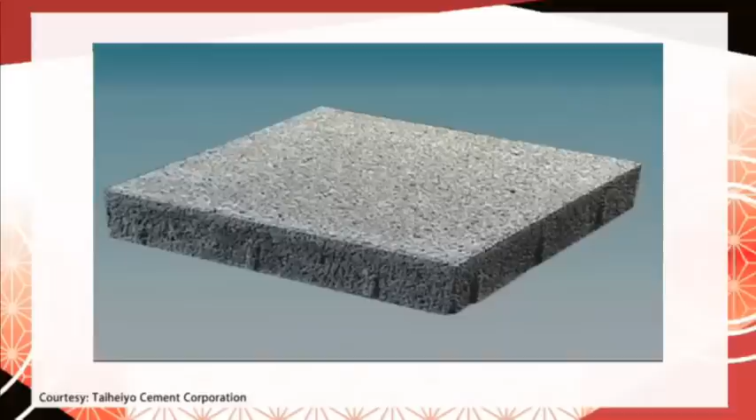One example is so-called porous concrete. It's gaining attention internationally because it allows water to pass through, as you can see over here. It's very interesting. You think that concrete is something that blocks out water and is very solid. I can't agree more, but this porous concrete has numerous consecutive spaces inside to let out water, and is also referred to as permeable concrete.

This material is often used for roads and allows rainwater to seep underground, so it prevents such problems as water spatter, reflecting flare from car headlights, slipping tires, and also hydroplaning. Wow. It's hard to imagine that something as common as concrete could incorporate such complex technology. Now, the biggest cement producer in Japan is called Taiheiyo Cement, and we had an interview with the president, Shuji Fukuda, so take a look.

Executive Insight. Concrete and concrete products are used all around us. Examples include structures such as buildings, bridges, roads, tunnels, and massive dams. Essential for making such concrete products is cement.

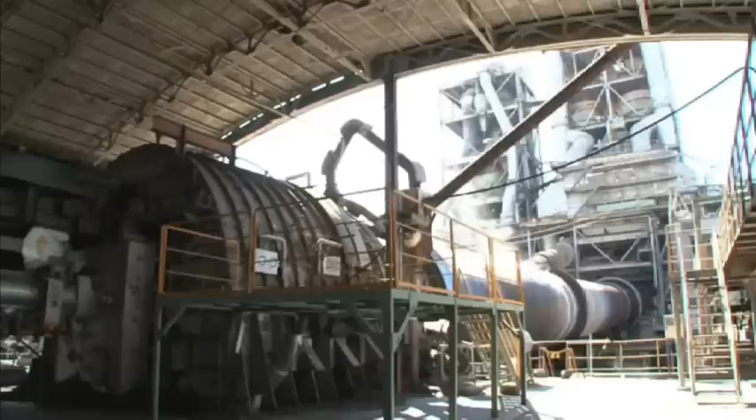Japan's biggest cement producer, Taiheiyo Cement, has a 130-year history and is said to have been one of the companies that literally paved the ground on which the Japanese economy was built. Overseeing the vast business is the president, Shuji Fukuda. You were founded 130 years ago and have grown from a locally based business into a company with the top market share and nearly $7.5 billion in revenue. What has been behind this growth?

In the beginning, the business of cement was locally based. Then capital from Tokyo started flowing into the industry, spurring mergers between companies. There were quite a lot of independent firms back then. The history of cement has been walking lockstep with the development of Japan.

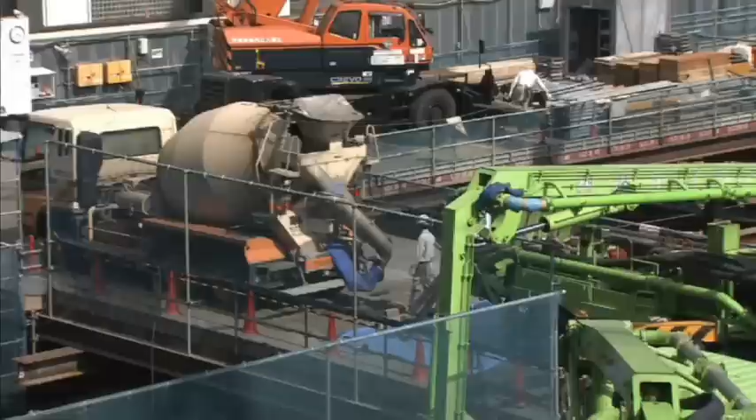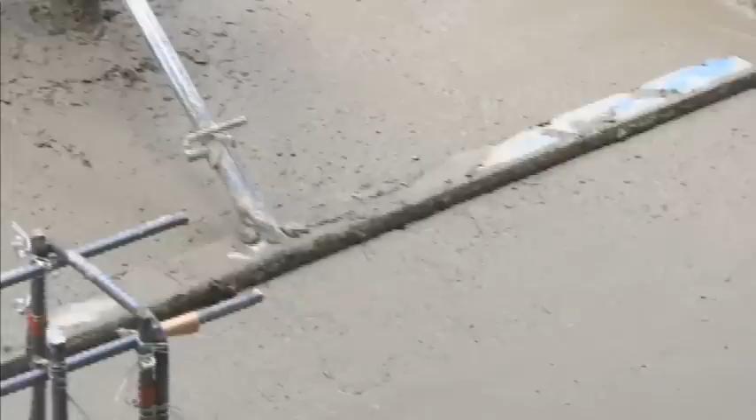The most commonly used cement is called ordinary Portland cement. Accounting for 60% of the cement produced in Japan, it is regarded as being safe, strong, durable, and easy to work with. Due to the high versatility of the material, it has been used in concrete for a wide range of fields, including general civil engineering and construction.

Concrete is, of course, something you use for 50 or 60 years. In terms of cement, quality is the most important factor. A big reason we're trusted is because customers believe that our products won't fail no matter what happens. We've had long relationships with our customers, some for up to 130 years. We have to make sure never to betray their trust. That's why I'm very demanding about quality.

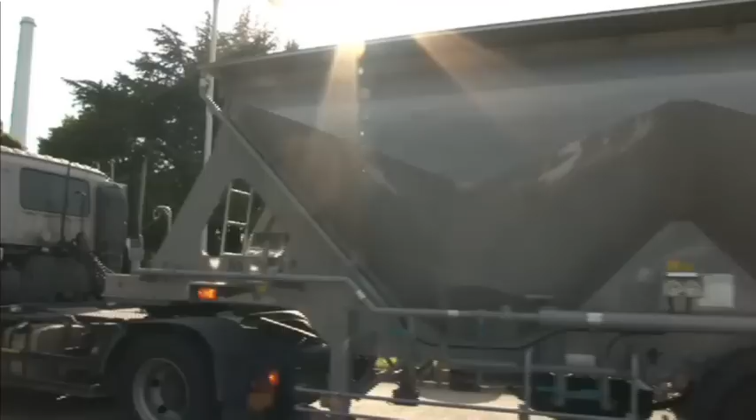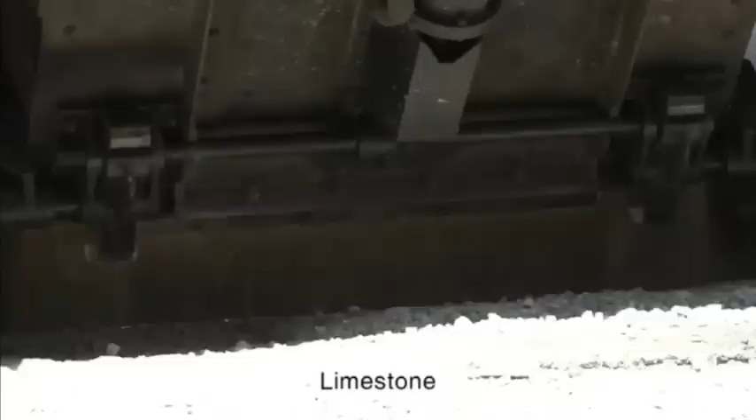This is the Kumagaya plant in Saitama Prefecture, central to the company's manufacturing operations. We were shown how quality control is carried out here. A train rolls into the plant. Loaded in its carriages is limestone, the raw material of cement. It was dug up at a mine and transported directly here. Limestone is actually the only mineral in which resource-scarce Japan is completely self-sufficient.

The limestone used at this plant originates in two completely different regions of Japan. If you look at the makeup of the limestone we use here, compared to elsewhere across the country, you'll see that it has a high degree of whiteness. The composition of limestone is different depending on where it is mined. The technique of controlling that to produce uniform products has been cultivated over their 130-year history.

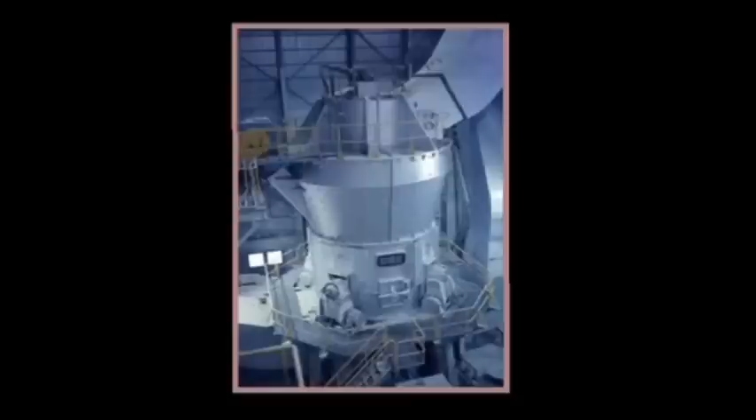In addition to limestone, other materials such as clay, silica, and iron are used as main ingredients. After being mixed together in proper proportions, it is dried, finely crushed with a disintegrator, and stored in a tank.

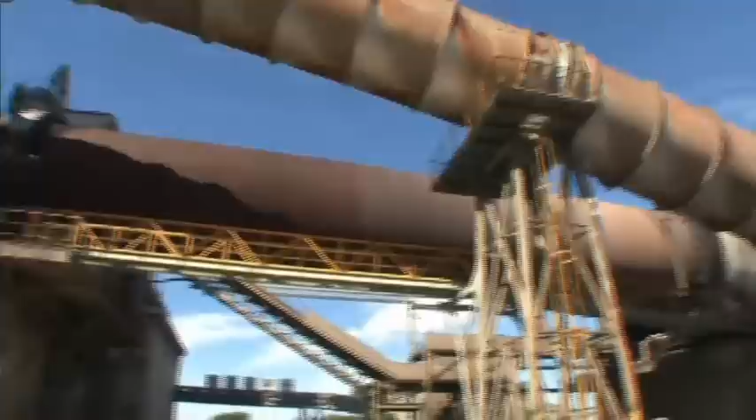Next, we were taken to the heart of the plant. This is the kiln to bake the cement. The ingredients that have been mixed are put through a firing process. After blending materials such as limestone, the mixture is poured in from the top of this tower. Then, while sliding down, it's baked, and finally slides from left to right inside the kiln.

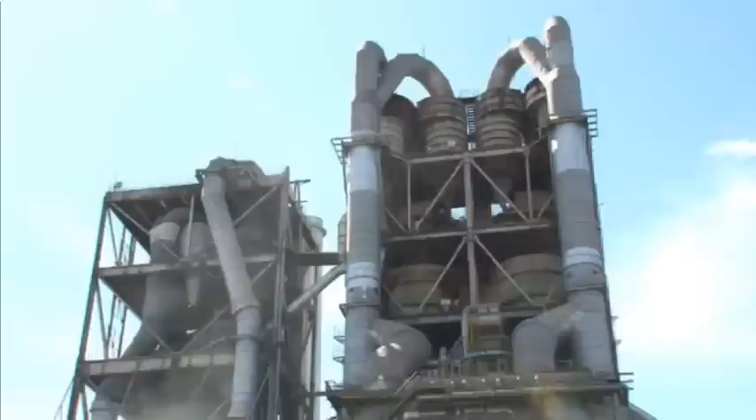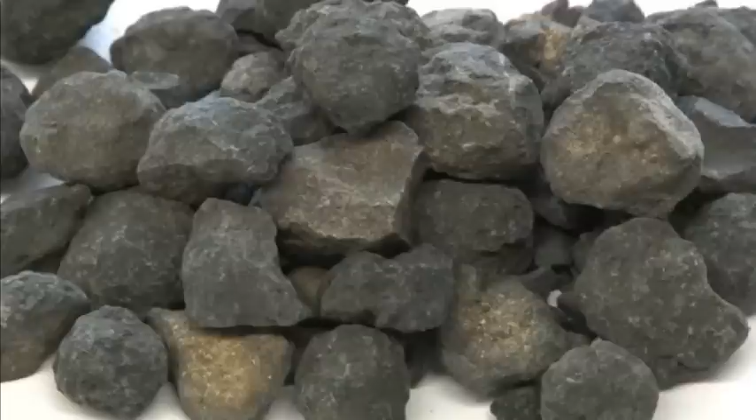By applying heat to materials such as limestone, the composition is altered and they gradually undergo a chemical change to become cement. Inside the rotary kiln, the cement is baked at a heat of about 1,450 degrees Celsius. Later, it's rapidly cooled with air, creating black lumps similar to volcanic rock called clinker. The clinker is crushed and mixed with gypsum to produce cement.

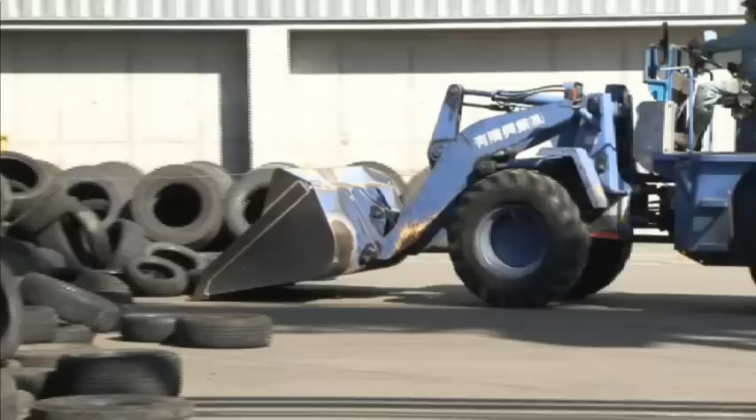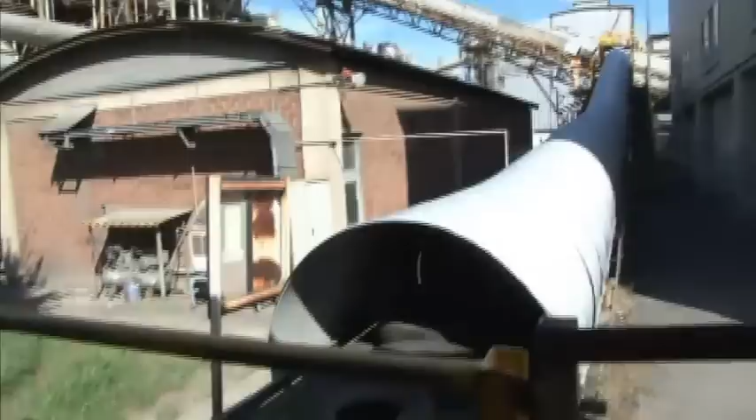Using this process, the company has been actively developing cement that incorporates industrial waste. These waste tires are used as auxiliary fuel for the coal firing process. What's more, the steel wires inside the tires also have a purpose, as they can be used to supplement the necessary iron composition of cement, so nothing is left over. Waste tires are used entirely as a resource.

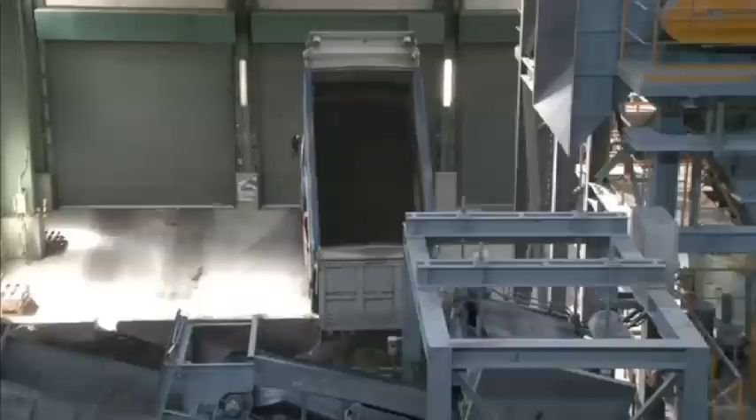The material brought to the plant by the truck is incineration ash discharged by waste treatment facilities. Typically buried in landfills, it plays a role here in cement production. Japan discharges a tremendous amount of waste incineration ash, so I find it extremely interesting in the way it's being recycled. One of the biggest problems in this country is what to do with ash from incinerators, and landfills are reaching capacity. In terms of composition, it can act as a substitute for clay, which is needed to make cement.

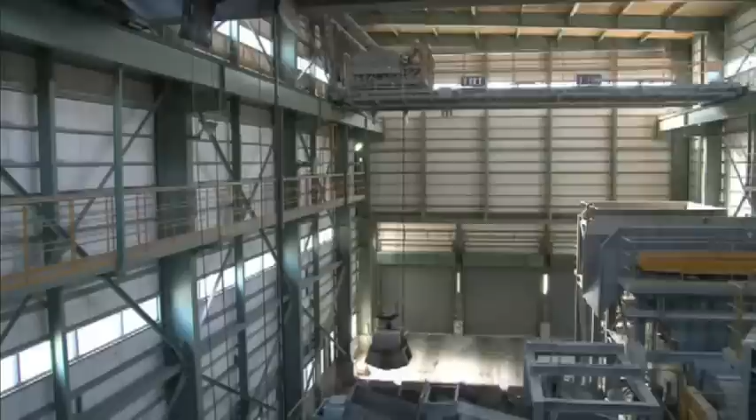This kind of waste isn't simply a nuisance. It can be turned into a useful material, like cement. In fact, for every 1 ton of cement produced, we get rid of about 500 kilograms of waste materials. That's the role our industry plays. Cement mainly consists of 4 elements: calcium, silicon, aluminum, and iron. Of these, aluminum, silicon, and iron are found in many types of waste. By recycling industrial waste, the environmental burden of the main ingredients of cement is reduced.

Armed with these technologies, the company has been aggressively pushing into overseas markets. We have cement plants in China, Vietnam, the Philippines, and the US, as well as a cement mill in Papua New Guinea. As countries get bigger and expand, cement becomes an indispensable product. By putting our capital in those countries, we want to provide state-of-the-art cement to support their development. Overseas, we are committed to that mission as we move forward.

As underscored by the government's National Land Strengthening Project, there's a need to solidify infrastructure. I imagine there's a growing demand. Amid this, what are you doing to develop even higher strength concrete and cement? Well, whether you're talking about concrete or cement, both products are difficult to differentiate. But with our cement, we work to accurately capture the needs of our customers, what their requirements are. We make our cement, our core product, according to those demands.

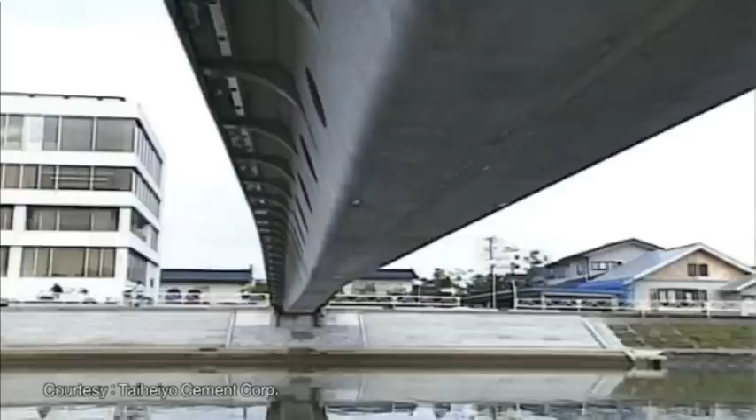There is something called Ductal. It has quite a high degree of strength. This is the type of product that will gradually start coming out into the world. Ductal, an ultra-high-performance cement, is being used in the construction of a bridge in Yamagata Prefecture. There are no steel reinforcements. What's more, there are no beams typical of bridges. The structure is made entirely of concrete.

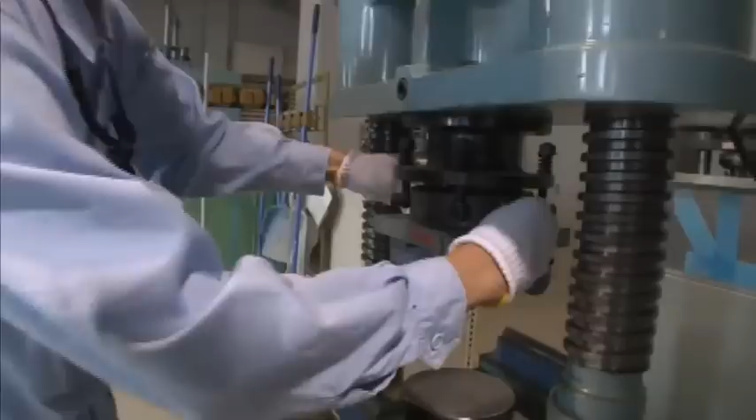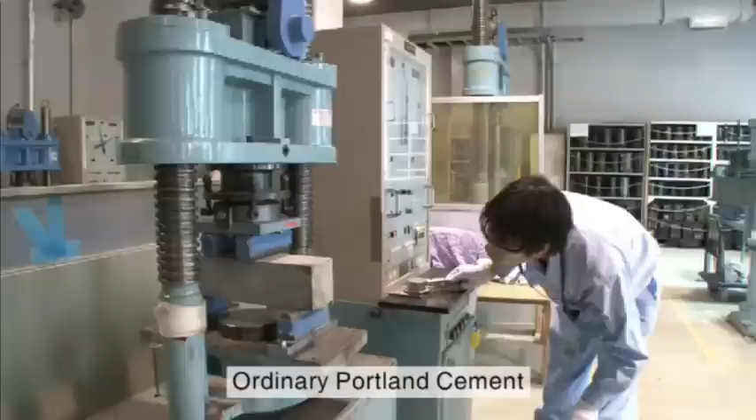What is the secret to its strength? To get the answer, we visited their main research facility in Chiba Prefecture. To demonstrate the strength of Ductal, they carried out a certain experiment. This is Ductal, and this is regular concrete. You can see that Ductal has a slightly darker color. First, pressure is applied to regular concrete. Cracks start to appear, and with more pressure, it splits into two. The maximum pressure applied was 14.85 kilonewtons.

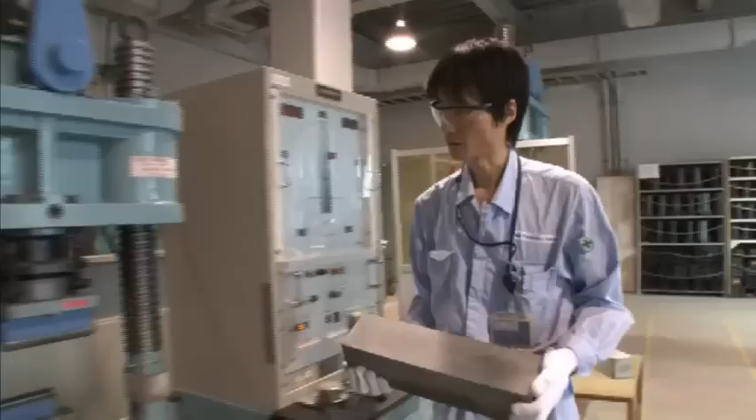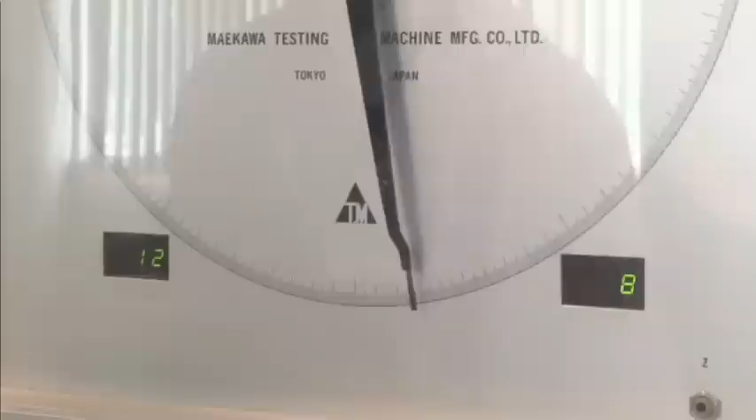Next, they apply pressure to a concrete block made with Ductal. There's a cracking sound. A slight crack has appeared, but compared to regular concrete, there's a clear difference in the way it formed. The pressure applied until regular concrete broke was 14.85 kilonewtons. For Ductal, it was about 101.1 kilonewtons. At this point, the pressure is 7 times higher.

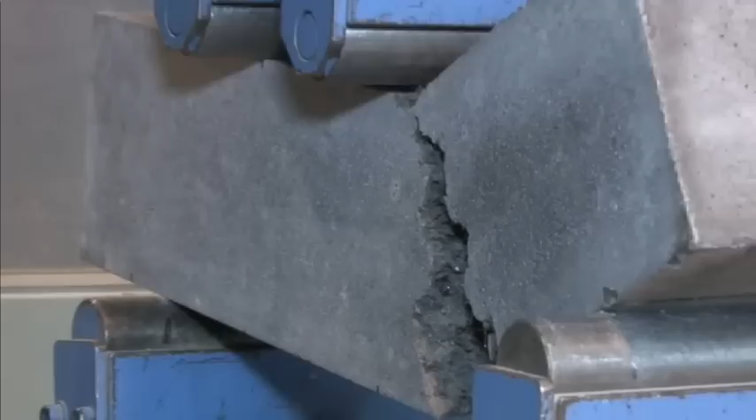Until the experiment ends, the concrete block made with Ductal doesn't break apart. These metal fibers have the same thickness as hypodermic needles. Because they contain many thin fibers like these, sections that might crack and break in regular concrete can still transmit strength even after a crack forms. It is a specially designed material.

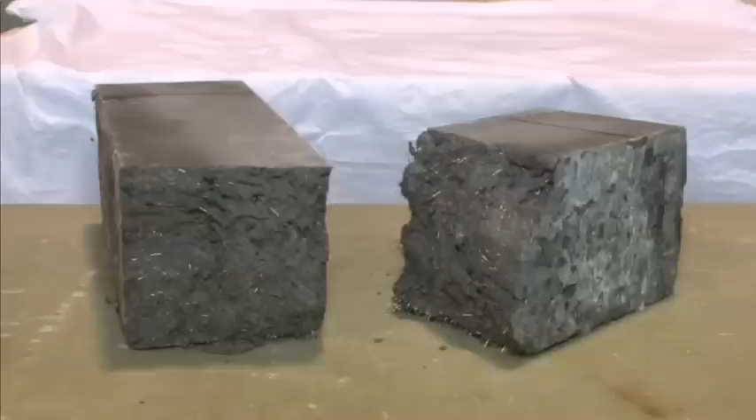The industry believes Ductal's high performance will pave the way for new applications of concrete. We're constantly keeping our eyes on market demand and trying to understand what everyone needs. Is it high-strength products or a material that's easy to work with? We want to meet those expectations. I believe that's something we always have to keep in mind.

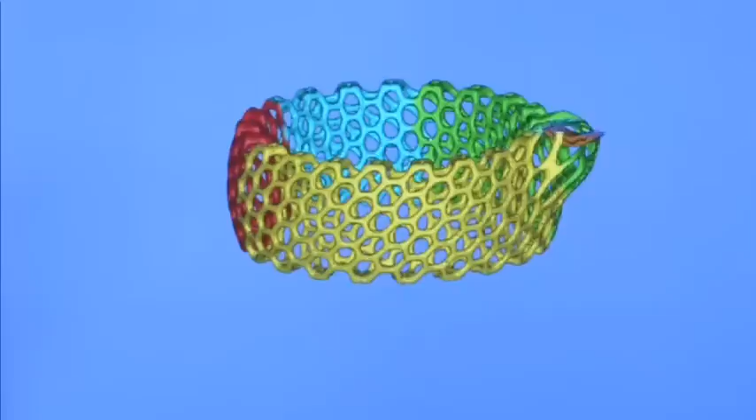So let me quickly explain how they work. Now, a 3D printer is a machine that turns three-dimensional digital data made by a computer into physical form, and they can use various materials to do this, such as resins, plaster, and metals, and they print out thin layers. They're laid on top of each other and then hardened. And so we've brought some items made by a 3D printer in the studio today. And as you can see, they're three-dimensional.

Yes, but it's so amazing. They're so precise and delicate. I know, and you can use various colors, and they all come out at once. So these are all printed out. They're all printed out. Unbelievable. It's a bit mind-blowing. Well, it's now more affordable and easier to use then. Yes, exactly. So that's why I went to see how this technology is being used by Japanese businesses. Take a look. The Project Japan.

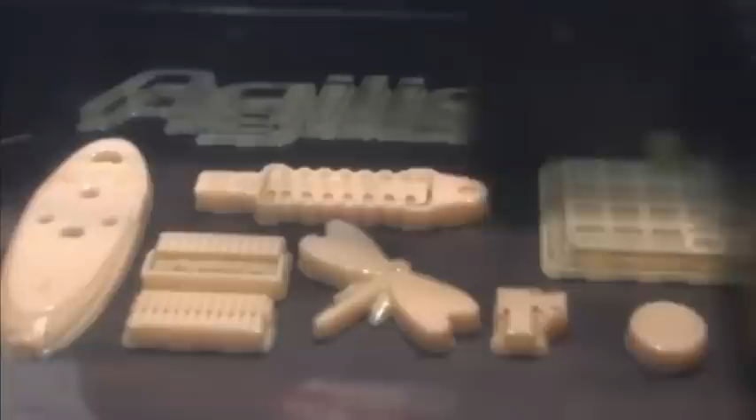This June, an exhibition was held in Tokyo. On display are various 3D printers from high-performance commercial models to those geared towards consumers. Japan-based Keyence showed off this product. They say it incorporates a technology that's a world first. Our 3D printer employs the world's first water-soluble support material. It's a support material that dissolves in water. For example, shapes like this. Immediately after they're made, something called a support material covers the entire object, and it's not possible to see the shape. By dissolving it in water, the shape becomes visible and the process is completed. Producing items is easy.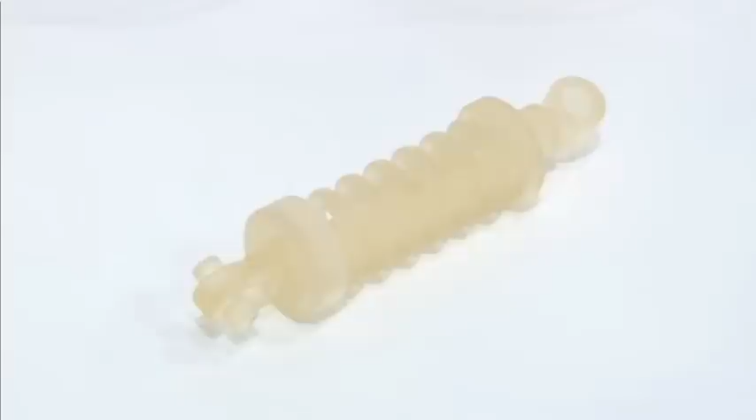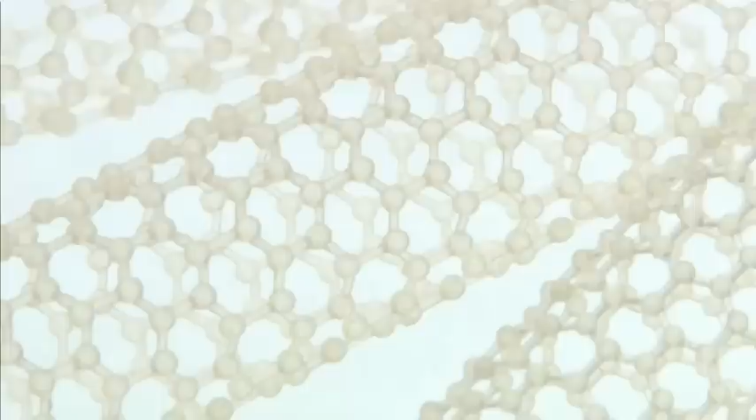Support materials are a secondary substance to maintain the shape of the object being printed. Once the object is made, it must be removed. Typically, a chemical solution is used or the material carved off with a blade or other sharp implement. Their new product does away with that process, in addition to making it possible to create complex shapes. Until now, the production of a prototype outsourced to a third party could take 1 week to complete. But with 3D printers, product development takes just 2 to 3 hours. That's one of the advantages.

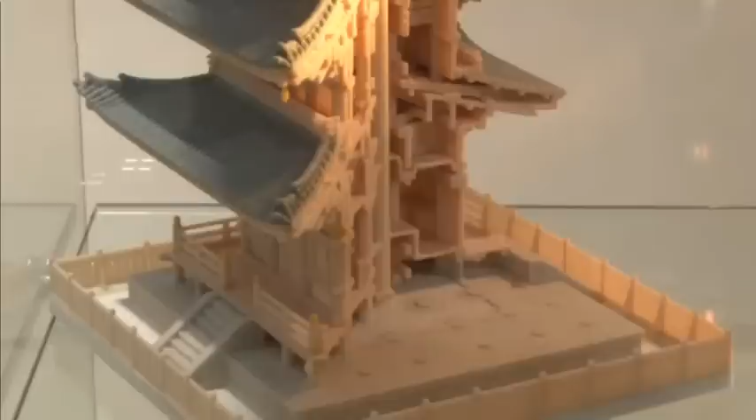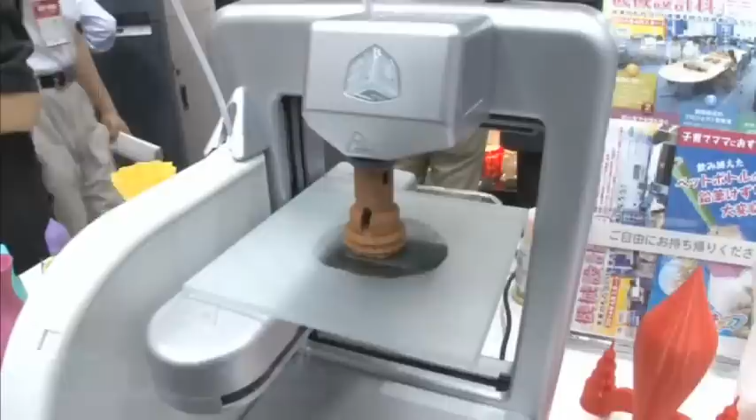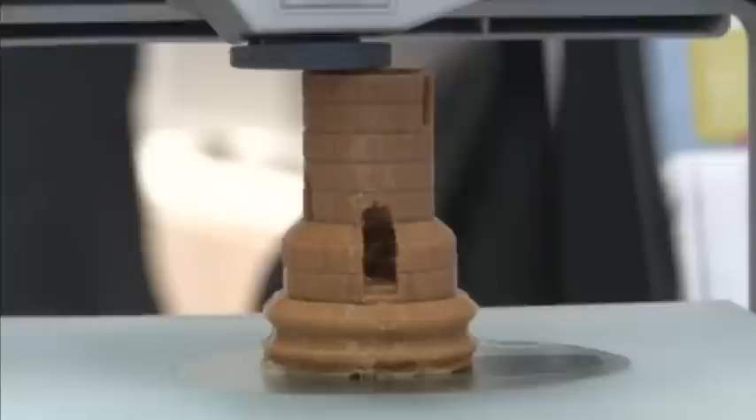At this booth, products made by a US company are on display. They have a broad lineup, from those costing hundreds of thousands of dollars to lower-end consumer models. This one is priced at about $1,600. We're positioning this as a home-use printer. You can make rings that you designed yourself. For those who want to use it in a slightly different way, for example, if you're having trouble finding a cover for your bath, it's possible to design one by yourself.

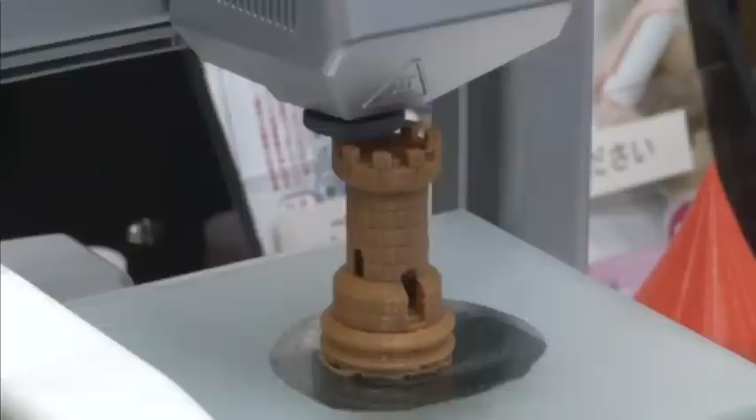They offer a selection of plastic resin in 16 different colors. The resin passes through this narrow tube and is melted at high heat. By applying several layers, a three-dimensional object is produced. They say 3D printers can be easily operated by novices. We decided to give it a try. I'm about a 10-minute walk from Roppongi Station in Tokyo, and I've heard there's a place where it's possible to use a 3D printer, so let's take a look.

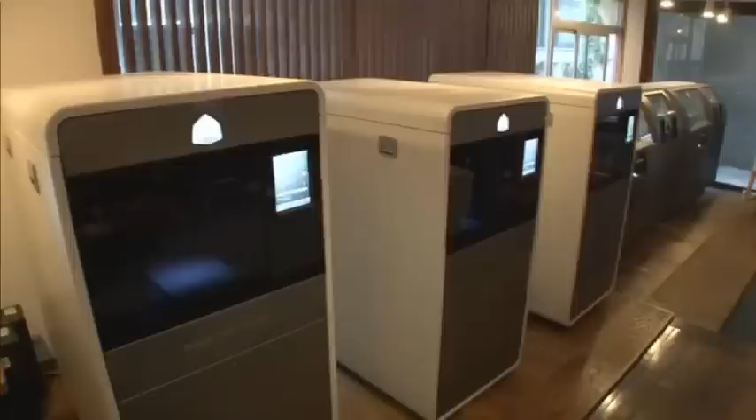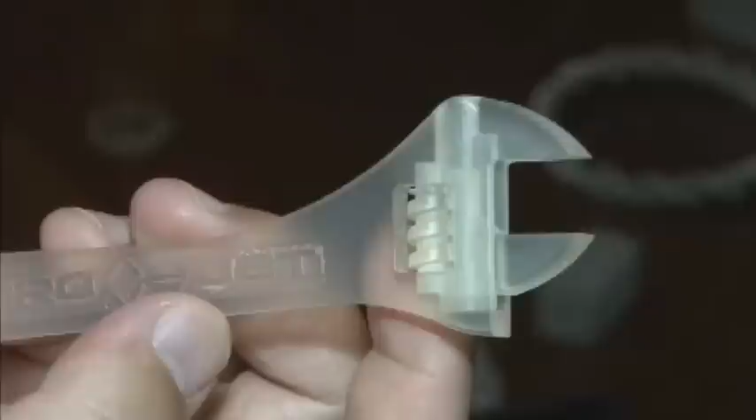This facility is equipped with 5 3D printers. Based on 3D data sent over the internet by users, the company undertakes the production of three-dimensional objects. The service was jointly launched by DMM.com, Nomad, and TeamLab this July. They serve corporate customers as well as individuals. This time, with their cooperation, we were allowed to get our first hands-on experience.

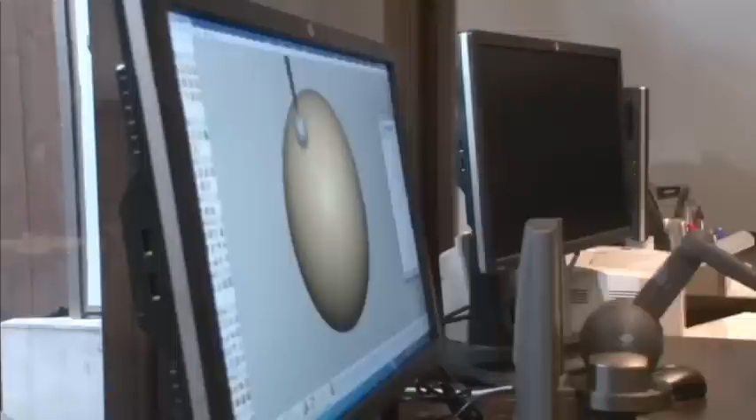Will you help us today to make something? Of course. Come right this way. This is a pen-type 3D tool called a 3D mouse. Here, try holding it. When you hit the data on the screen, you'll feel that sensation. You're right, I feel something. It bounces back. And there's a button in this section. Try bumping into the sphere while pressing it. A hole opened up. How interesting. It's like poking a hole in clay.

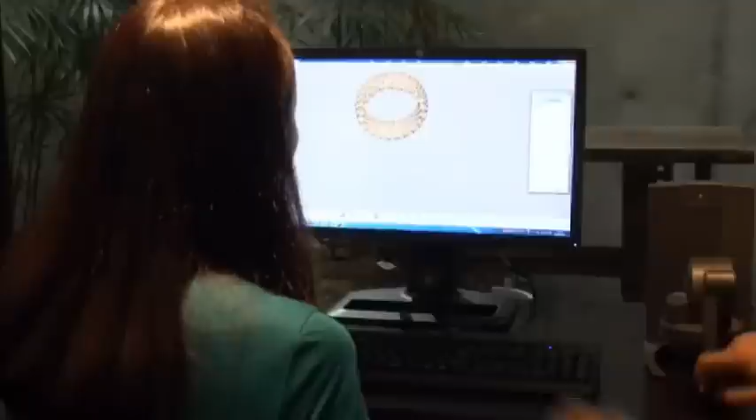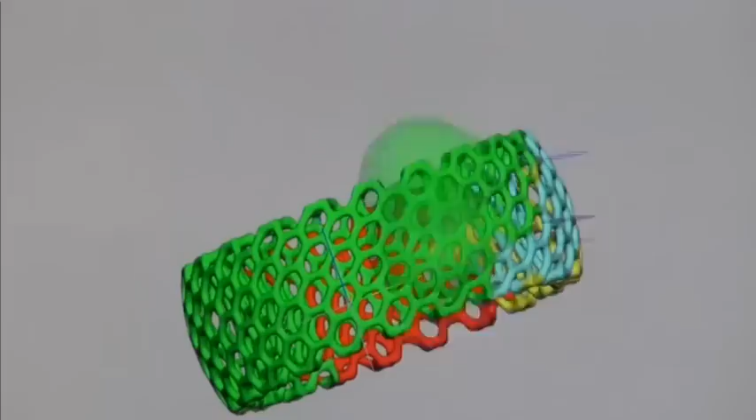This time, we decided to make a bracelet. We begin by working on template data. If you think you've overdone it, use the keyboard like this, and you can go back. Colors can also be easily added. As the finishing touches and details are too difficult for a beginner to handle, a professional helps us out. Finally, a ring-like accessory is attached and the image data of the bracelet is complete.

Once the completed data is sent to the 3D printer, the actual printing begins. There's a vague shape. I'm starting to see some dots. I see it. This is how a 3D printer works. Following the same mechanism as an inkjet printer, it sprays a material to draw a graphic. Then, thinly sliced horizontal cross-sections of the object appear. These are layered on top of each other multiple times to create a three-dimensional object.

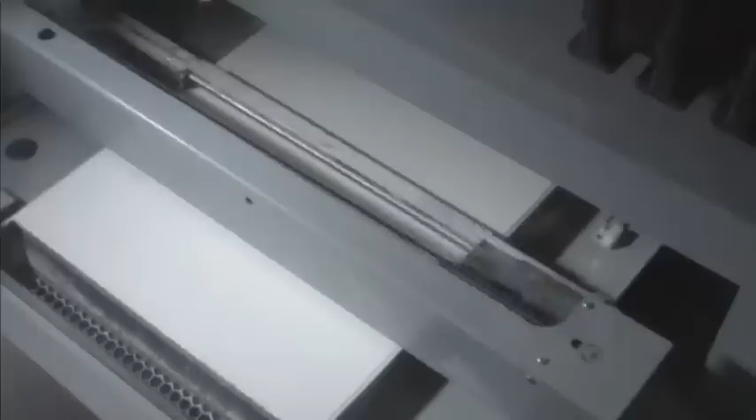This time, we'll use 2 types of materials. One is plaster, which can be colored using the printer. The other is acrylic resin, which is a plain color but makes it possible to create detailed shapes. For an object the size of a bracelet, it takes 2 to 3 hours for plaster and 12 to 15 hours for acrylic resin to be fully processed.

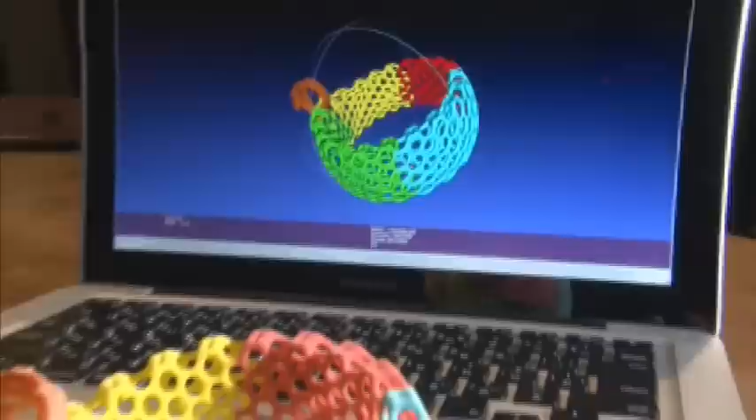Hearing that the bracelet is ready, we revisited the facility several days later. This is the completed product. Wow, this is the one made with plaster. Compared with what's on the screen, the color, the specific sections, and even the ring part added on later are all exactly like the original design. That's correct. It's a bracelet, of course, so it fits perfectly on my wrist.

This is the product made with acrylic resin. If you look closely, the flower petals and stamens and pistils are recreated in fine detail. It's amazing.

What is the advantage of 3D printing? It's often said that 3D printing will replace existing crafting methods such as machining and molding, but we don't see it that way. Machining has its own strengths. It's difficult for 3D printers to win against that field. Rather, it's about allowing people who until now had a vague idea about something to easily create three-dimensional data and give shape to one-of-a-kind items for themselves or to give as a gift. They offer a new way of thinking.

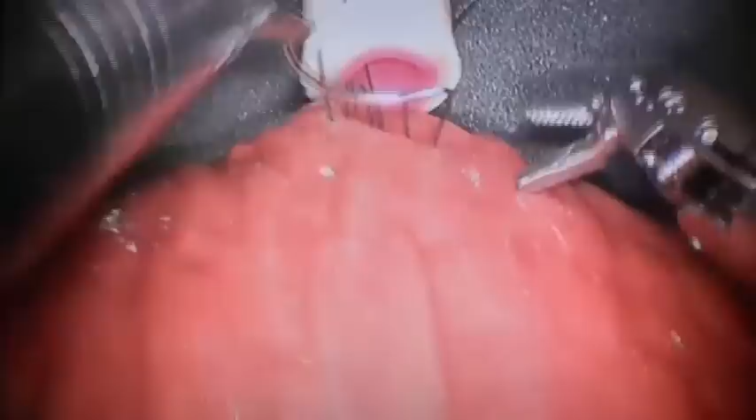Products made by 3D printers are also being used in the medical field. At this hospital in central Tokyo, 3D printed products assist in surgical procedures. This is a hospital specializing in nephrology and urology. The doctor is operating a surgery assistance robot. While looking at the camera images, he controls the medical tool at the tip of the arm. It's a training exercise for sewing the bladder to the urethra.

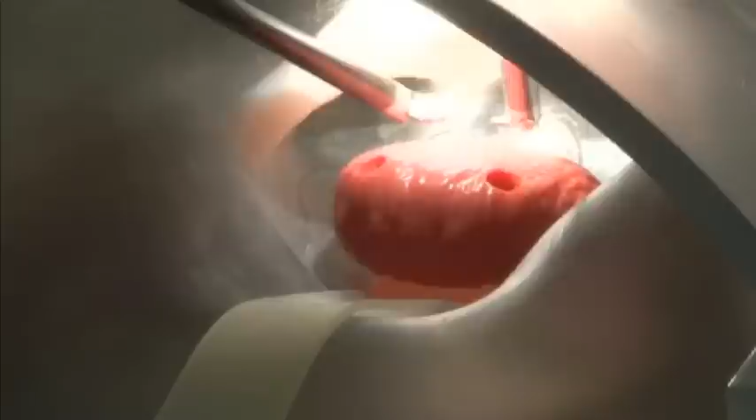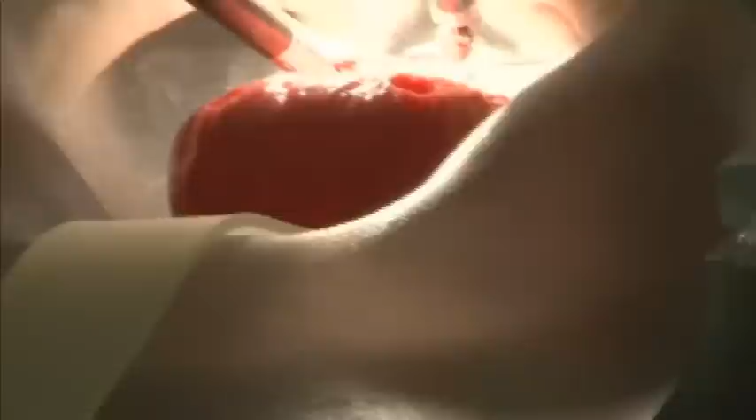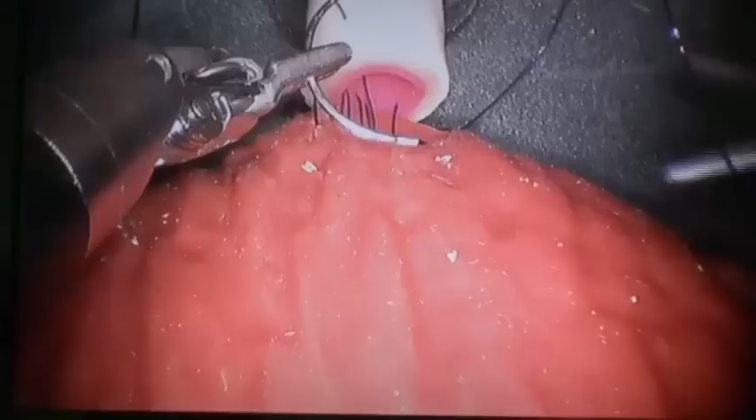The organs aren't actually real. They were made with a 3D printer and are highly detailed models. Since September 2012, this hospital has been using models made with 3D printers to train doctors in prostate cancer surgery. With robotic surgery, you don't have the sensation of touch. So we use vision. That's to say, surgery is carried out by focusing on the information we can capture with our eyes. The 3D printed models are exactly like real organs in terms of the way they look.

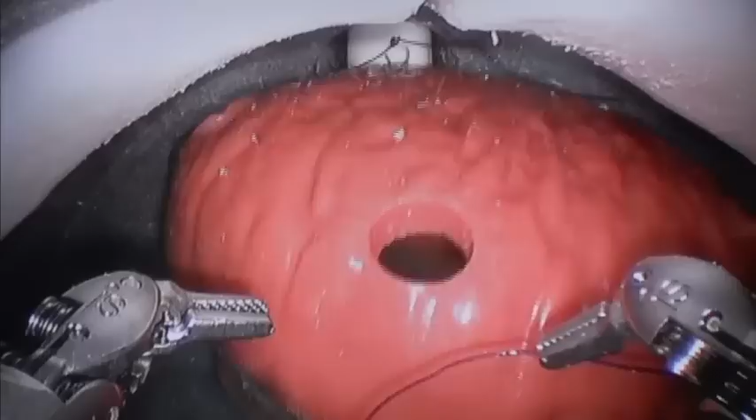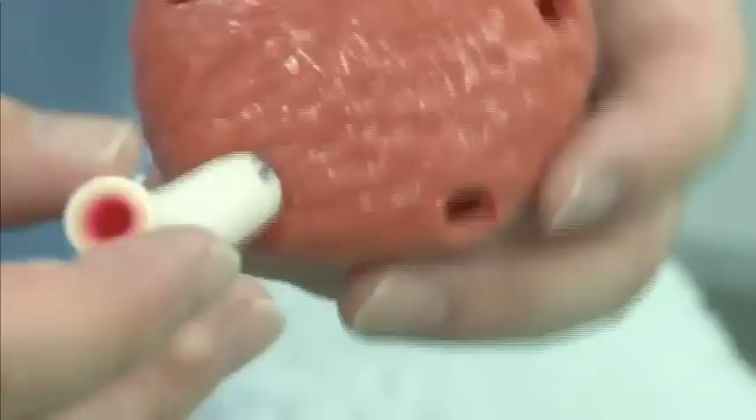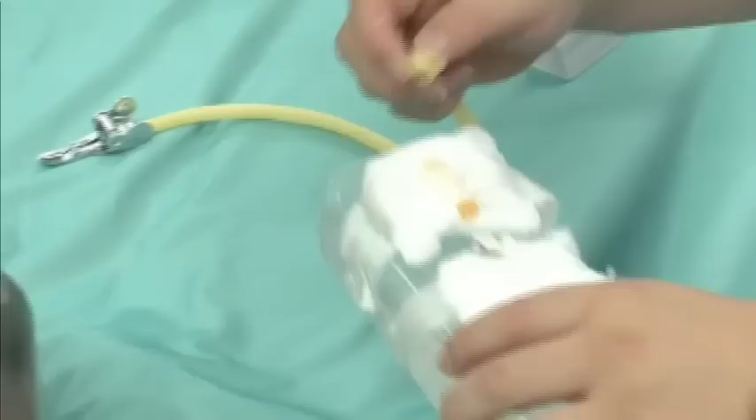Now, let's see how the organs look sewed together. The sewing is very clean. I think the models have a very precise surface sheen and grooves. In the past, they used plastic bottles attached with rubber tubes. We used to practice by cutting rubber tubes that were meant to look like the urethra and bladder. I made them myself, but they were far removed from reality. By practicing on lifelike models, they say actual surgery times have been drastically shortened.

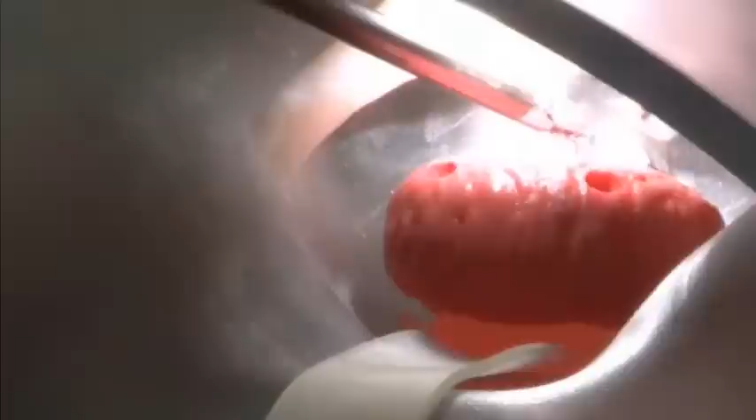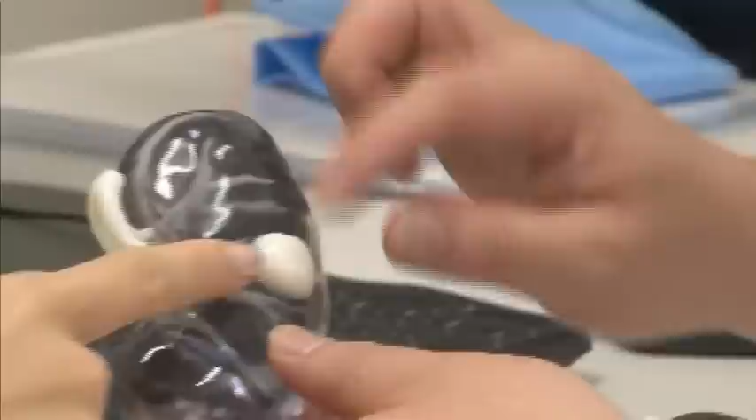There are other uses for models made with 3D printers. This is a model of a patient's kidney. The white area is a malignant tumor. In other words, cancer. It's been replicated so that the internal blood vessels are visible and to show how it would look after the cancer cells are removed.

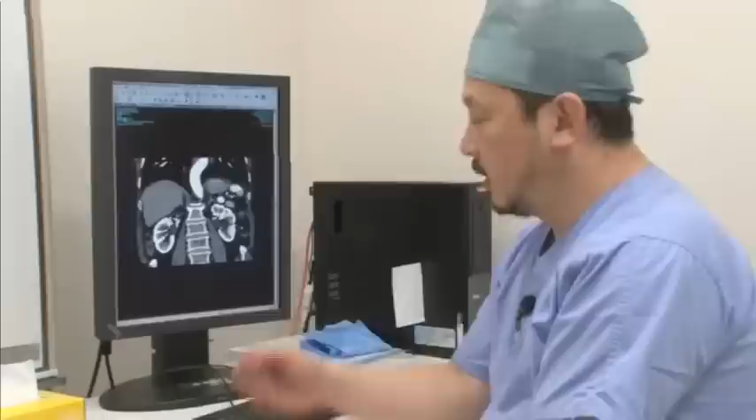The doctors can use this as a reference before surgery and explain the operation to patients. Seeing not just images, but a three-dimensional model is very convincing. Patients can even touch it. Explanations to patients are taking a big step from visualization, in other words, what can be seen, to haptization, what can be touched.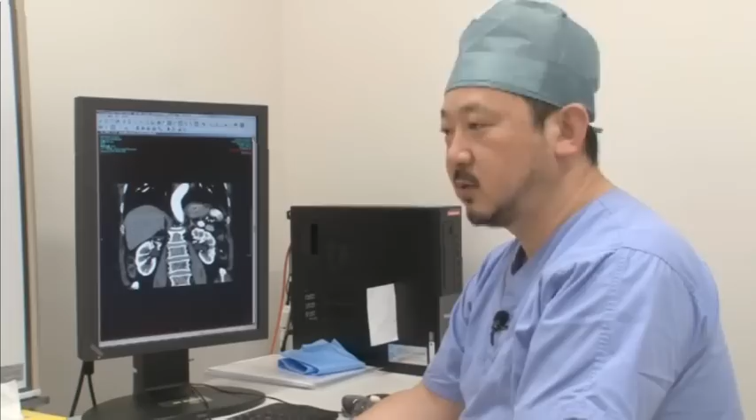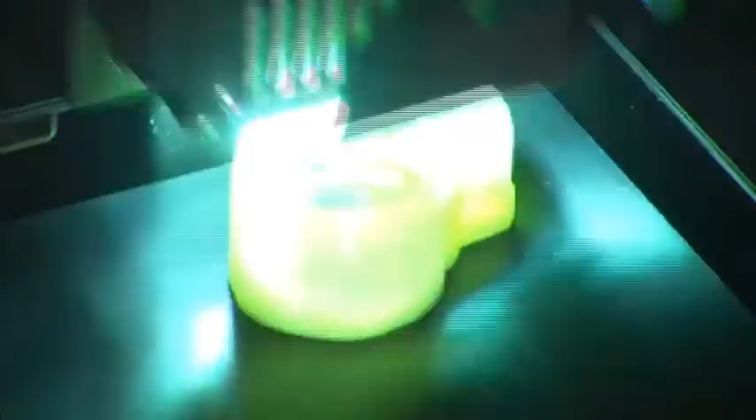The organ models were developed and manufactured by FASOTEC, which sells 3D CAD systems. They had been developing prototypes of industrial products using 3D printers, but entered the medical field in 2012. Now they supply models of organs and human bodies to over 20 medical institutions.

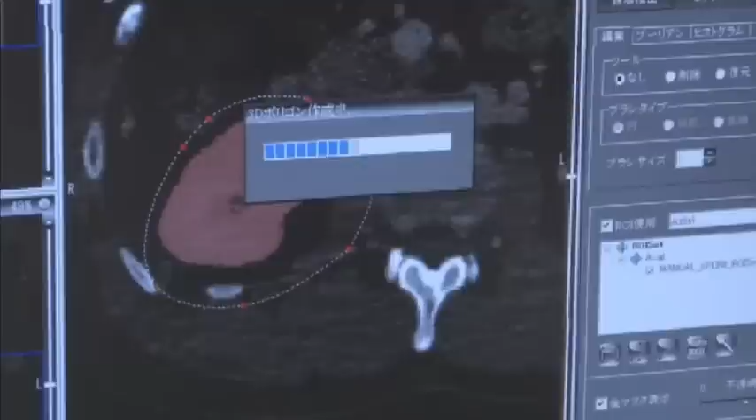Using CT scan data provided by hospitals, they prepare a diagram and recreate patients' organs in detail. They say their software allows image data to be modified, allowing them to make diagrams for specific purposes, such as how an organ would look after a tumor is removed.

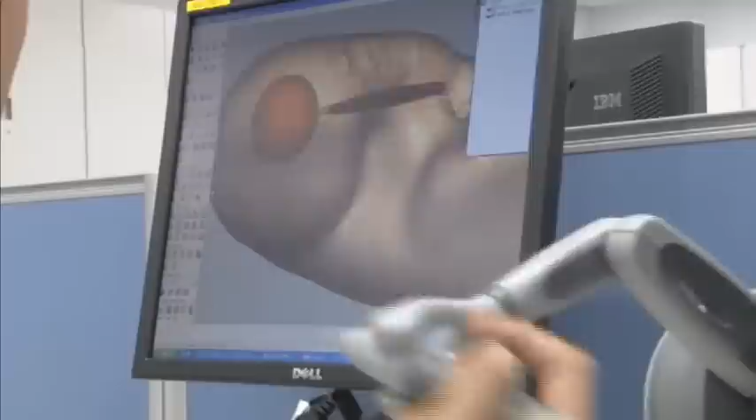This is a model of a liver. It has been made with a transparent material so that the blood vessels are visible. The texture can also be made lifelike.

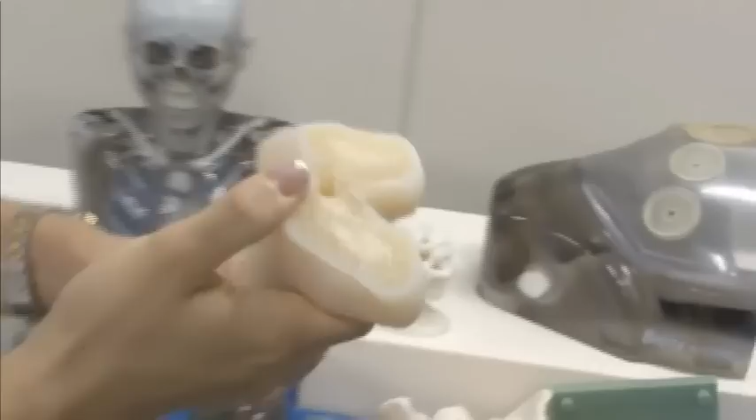This model of a bone has a complex structure. This bone cannot be made with just image data from a CT scan. On a computer, we add data that incorporates the mechanical structure. Then we use materials such as rubber, gels, and hard white resin in complex combinations and rely on a 3D printer to make this.

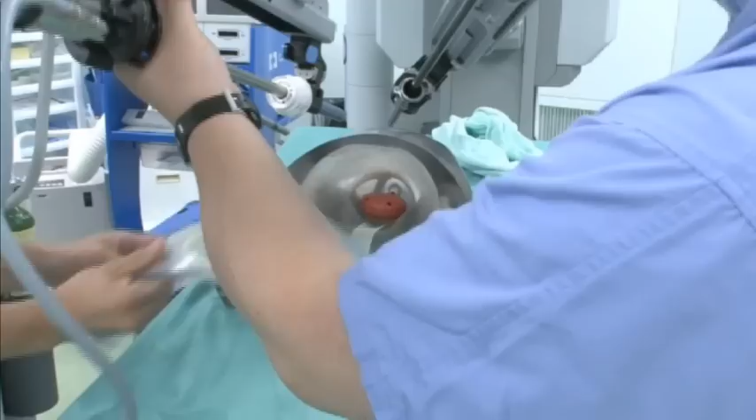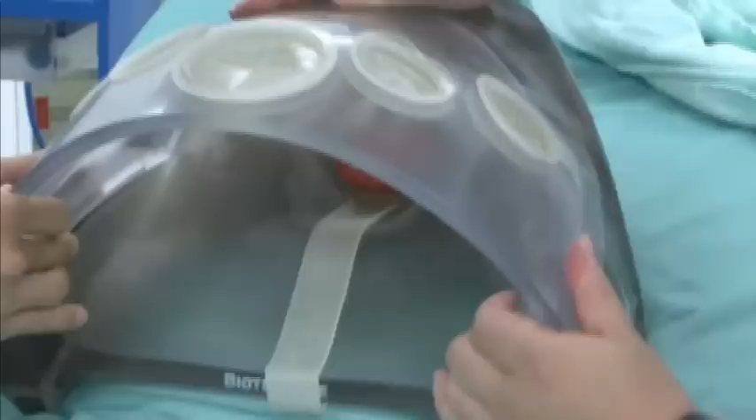This is a combination of several models such as those for the pelvis and bladder. It is a product made specifically for surgery training. Models not just of single organs, but system-type products are another area that the company is focusing on.

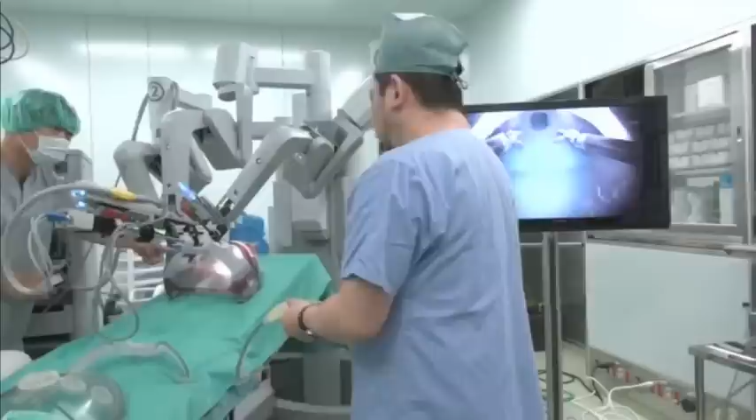While surgeries that are less burdensome on patients are increasing, the burden on doctors is growing. There's less of a burden on patients, but doctors are required to improve their skills. So now we're developing simulators to help them do that. They're training tools that are authentic replicas of the human body. We plan to develop more of these types of products in the future. We're hoping to expand into the medical field in Asia within 3 years.

Now let me show you some accessories that I made during my experience at the 3D printing office. So these are what came out of the printers. Bracelet, kind of. And you can touch it. It's made from plaster. Wow, very light. It is, isn't it? And very colorful. Exactly. I just painted. I know it's not very tasteful, but I just wanted to show how easily you could use different colors. And also, we kind of fused a bracelet and a ring. Very unique. It is, definitely.

And another unique item. What is that? It looks like a face of someone. It is, it is. And it's actually made from chocolate. Oh. And the thing is, it's not actually printed. You can't actually print chocolate yet. That would be groundbreaking technology. But it was an event held by several companies on Valentine's this year, and it allowed participants to make chocolate with an image of themselves on it. So this is a few of the participants' faces.

And it was made by scanning a person's face and then creating the model of the person by using a 3D printer. And then they made a mold, which is over here, using the 3D scanned model. And then they put in chocolate and hardened it, and this is what they came out with. So the ways that you can use a 3D printer are just limitless. Well, this 3D printer seems very promising, but are there any obstacles?

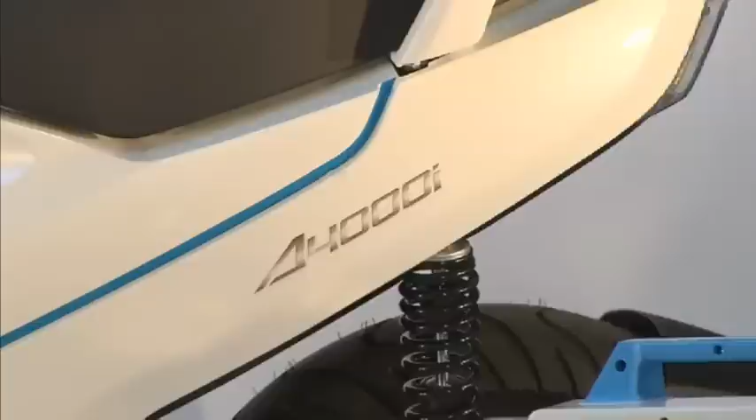Terra Motors recently announced a new model. It can travel a distance of up to 65 kilometers on a single charge, 20 kilometers more than before. With this renewed model, the company is also eyeing the Asian market. In Japan, they've set their sights on the demand from the delivery industry.

We believe the next big trend is the expansion in the delivery sector. A growing number of companies are starting delivery businesses. We're positioning electric scooters in the industry as a quiet delivery method. They've not only increased the capacity of batteries, but also added a function linking the scooter to smartphones. By aggregating driving and location data, they say it can lead to improved work efficiency.

Electric scooters still aren't widely known in Japan, so I believe there are various possibilities. It's been 3 years since electric scooters began taking off in Japan. But does the market have the muscle to zoom ahead?

Well, Tsuda-san, I understand our next topic is learning as business opportunity. Yes, it is. Now, David-san, have you started doing any activities or taking lessons after you graduated from school? Well, some exercise and cooking lessons. Cooking lessons. How about you? Well, I've been taking golf lessons and I haven't been getting any better. But there are lots of people who are taking classes.